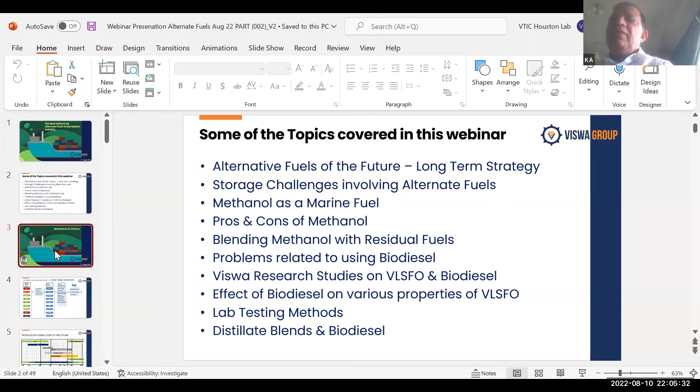Today's topic is really the burning topic today. So I will go over the alternate fuel, the choices you have for the future, and then I'll emphasize methanol as a fuel, as Dr. Vish mentioned. And then Dr. Sarah will cover biodiesel after that.

So first of all, with regard to the choices we have, the alternative fuel of the future, we have to look at the primary source where they are coming from. Because at the end of the day, that's what really counts, which I'll touch on in a subsequent slide, the life cycle carbon footprint. So the primary source is very, very important, where the fuel is coming from. The primary sources we have, as you know, are oil, natural gas, biomass, solar, wind, hydroelectricity, ocean energy, coal, and nuclear.

Then all these primary sources are processed and become the energy carrier, which we really use, like fuel oil, diesel oil, hydrogen, methane, methanol, ethanol and so on. Then the energy conversion takes place in the engines, we get the energy out of it and the ship moves, right?

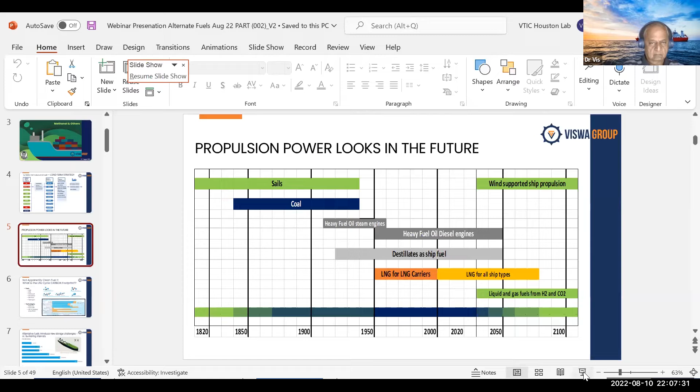So next is to see how the propulsion power looks in the future. We started with sails, looks like we'll end up with sails again. But these sails are different from olden days sails. They will be highly computerized to harness the best of the wind force. Then the transformation was towards coal. We are all familiar with heavy fuel oil and diesel oil we are using till today, including distillate. They will continue up to 2050, one way or other, in mixed form or whatever it is. LNG came into the picture, and it will continue beyond 2050.

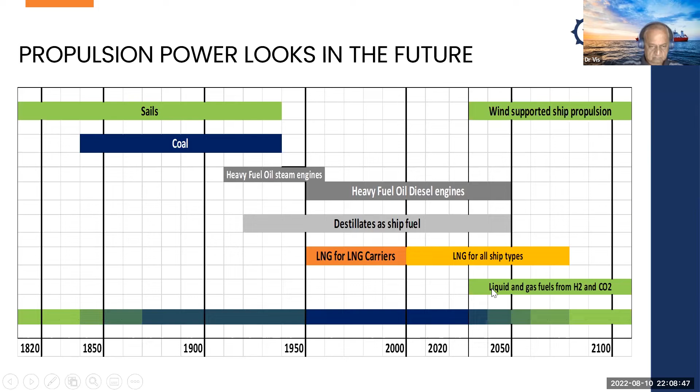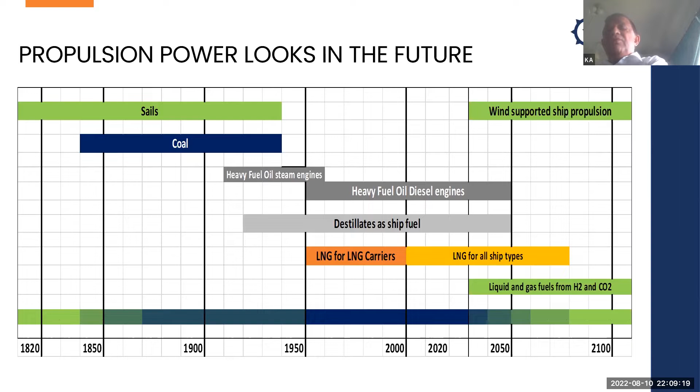But at the end, the fuel that really will win is possibly the liquid and gas fuels from hydrogen and CO2. And then you may ask about ammonia. Ammonia could be the carrier of the hydrogen. So ultimately, we are looking at hydrogen and CO2 as the fuel. Why this combination? Because at the end, if you produce even methanol, it will be from captured CO2, combined with hydrogen to make methanol. So at the end of the day, it looks like it will be hydrogen and CO2. So you are killing two birds with one stone: capture CO2, use hydrogen, produce methanol. That may be a good solution. Okay, next, please.

So as I mentioned at the beginning, the primary source of fuel is very important, because you can't simply say that I use hydrogen in the ship and it's very clean. It doesn't have any C, no carbon, no CO2, no greenhouse gas. But to process hydrogen, you need a lot of energy. It's very energy intensive. You can see the bar here. It is showing well to tank, meaning when it comes to the ship after being processed. And that itself is huge. Then it's not an angel anymore compared to today's heavy fuel oil, right?

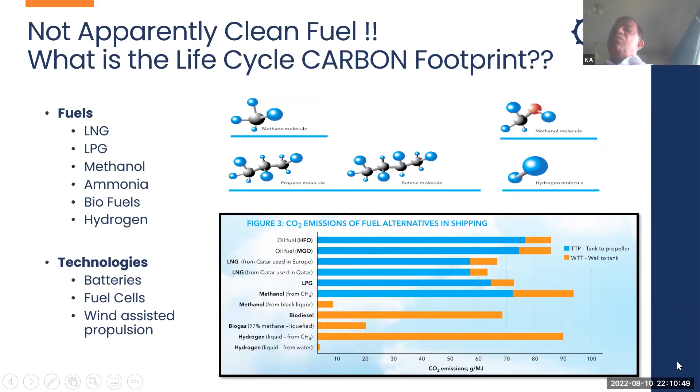So this is one thing we have to keep in mind with regard to the life cycle of that carbon you are using, right? Right from the well, and then when it ends up in the propeller after the energy is converted. So this graph shows you heavy fuel oil, how much is from well to tank and tank to propeller. Same goes for methanol, same goes for biodiesel. It's basically well to tank. The processing itself has its own carbon footprint. Next, please.

Another thing, for any fuel to be introduced in marine, many things need to be considered, like availability and infrastructure. And the first thing that comes to mind is storage, because it is very limited, right? When we talked about LNG in the past, it's the same thing. For the same round the world voyage, if you had say 10 tanks, to keep the same amount of energy you need 20 tanks of LNG.

So as you can see from here, the benchmark is low sulfur fuel oil. If it is one, LNG would need around 2 times that storage capacity. And LPG is almost the same. Methanol is 2.5. Ammonia is 4 times. Hydrogen is 6 to 10 times.

And with hydrogen, again, the question is how it will be carried, whether in gas form or in liquid form. Most likely it will be in gas form, like compressed hydrogen, for intra trading. That means you can bunker very frequently, and it can be compressed to 700 bar. But for ocean going vessels, most likely in liquid form, right?

So what this suggests is that if you are going for alternate fuel, you have to keep in mind what sort of tank capacity you will have. It simply means you may have to go for frequent bunkering instead of increasing the number of tanks in the ship. So you keep the number almost the same, but you have to bunker quite frequently. And when you bunker frequently, price discrimination between port to port also comes in.

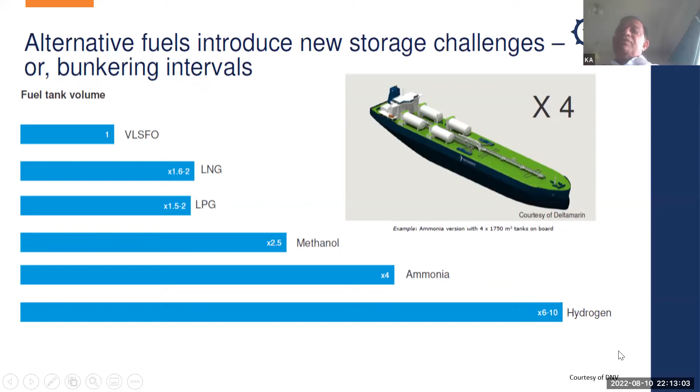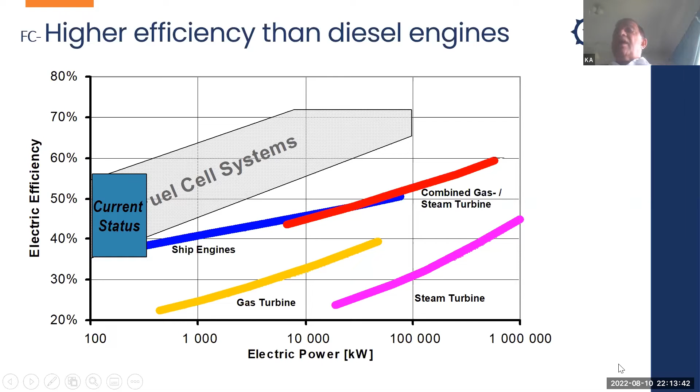With regard to the efficiency of the engines, as you can see from the graph here, as I showed at the beginning, maybe the fuel cell is going to win at the end. With the fuel cell, hydrogen is the primary source. But the efficiency of the fuel cell is much higher compared to today's ship engines, the diesel engines. You can see here it's around 70% efficiency, right? So this is what we are looking at, higher efficiency than the diesel engines. Next, please.

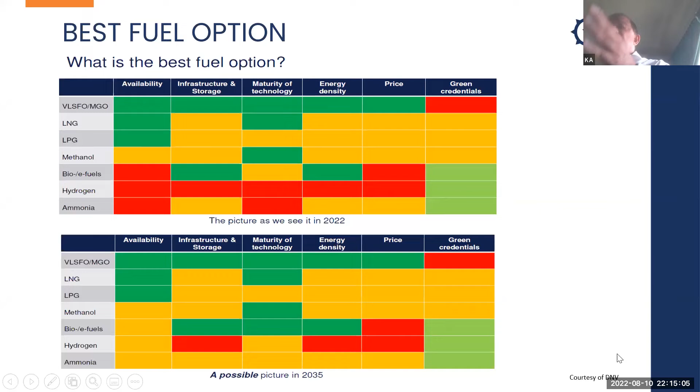I'm not going into detail, but you can get a feel of how it looks. Methanol is already there, more or less, in 2022, and in 2035 it will still be there, green and all. But for some things, like methanol's energy density, that's the default thing, right? You have to live with it. So, okay, next, please.

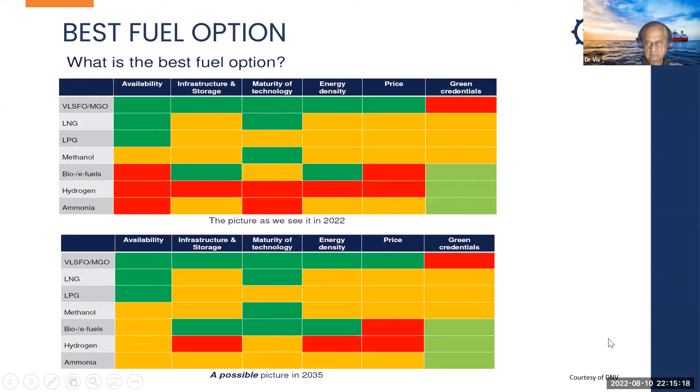So if you put it in a schematic diagram, it looks like this. We said ultimately everyone is looking at what is the primary source, not just saying that I burn hydrogen or I burn ammonia. You have to look at the primary source where it's coming from. So the primary source has to be renewable, take note of it. Nuclear is coming back, a lot of movement going on with regard to nuclear, with all its associated risk, but yet it is a cleaner fuel in a way.

So this renewable source will produce electricity. At the end of the day, the electricity that counts, that means to break, say, water by electrolysis into hydrogen and oxygen, we need electricity. So everywhere we need electricity. And then all this reformation, like even producing ammonia from nitrogen and hydrogen via the Haber-Bosch process, all this needs high pressure, high temperature, which again boils down to electricity.

So electricity from the renewable source, we have this electricity generated, and then we can have, in a simple form, electrolysis to break the water into hydrogen and oxygen. And then we can manipulate it. With hydrogen, we can produce hydrogen alone by itself, or hydrogen by synthesis with CO2. As I mentioned, it can produce methanol, and then you are killing two birds with one stone - you capture the CO2 from the ship's uptake, and then produce methanol yourself. So like this, e-diesel, e-LNG, e-kerosene, all will come. And the same hydrogen, when you synthesize with nitrogen, as in the Haber-Bosch process, produces ammonia.

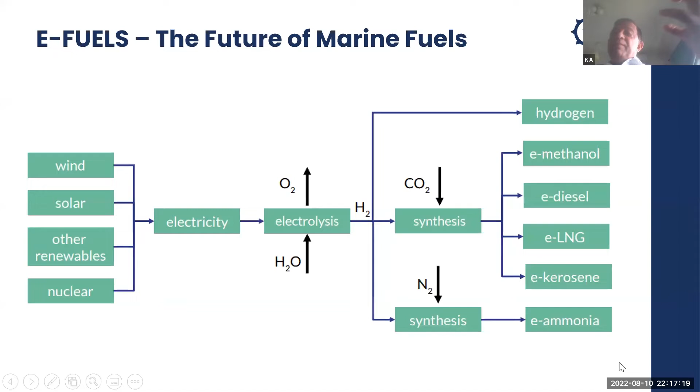So everything boils down again to the primary source, because this is what really counts.

At the end, another thing most likely to come is a mixed technology for power supply. This schematic shows the solar panel giving you solar energy, though it will be very limited for the ship given the limited surface area. But at the end, the solar energy goes to the battery, through the battery goes to the power management system, which is the central system that supplies electricity to the motor and turns the propeller.

So from solar, the primary source is very green. Wind sail, as I mentioned, will again feed into that power management system. And then below, be it LNG or ammonia that we put in, through some reformation you get hydrogen out of it, and that goes to the fuel cell. And again that reformation process is of course energy intensive.

But when it goes to the fuel cell, an interesting thing is you have low temperature fuel cells and high temperature fuel cells, but the high temperature fuel cell will ultimately win. With a high temperature fuel cell, there's even a byproduct, like the heat generated out of it - instead of wasting it away, you recover that heat, waste heat recovery. And then it again feeds to the power management, from fuel cell to the power management, and at the end you turn the propeller via the motor.

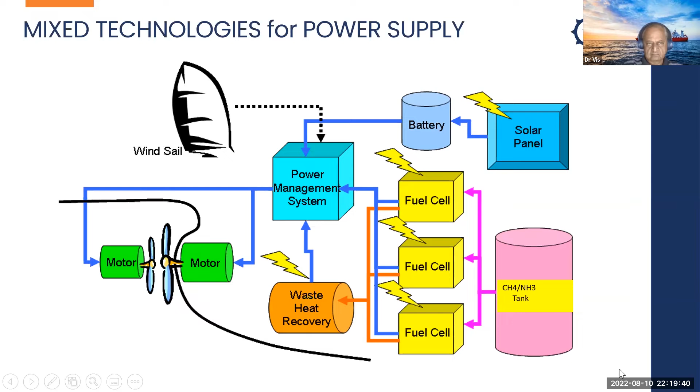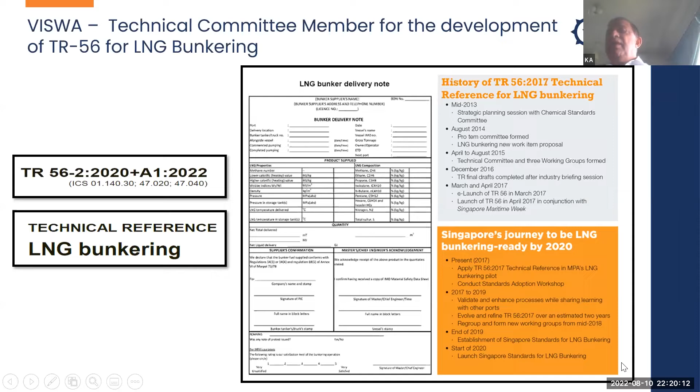Before I move on to methanol, just to let you know that Viswa is very proud to have the R&D - not many labs in the world do the kind of R&D that we do. And we are always at the forefront of all that development taking place. We were a member of the technical committee for coming up with the TR56 for LNG bunkering.

We are also partners with GCMD, the Global Center for Maritime Decarbonization - they had the press release on the 26th of July, and as you can see, Viswa is a partner of that. Here, a lot of green fuels will be tested, and many of them are not the usual tests - it will be sort of innovative testing. At the end, we are a partner for that and supporting this project.

We have done a 2 year biofuel field test with MESD, which is an NTU offshoot, and it was tried out on a ferry - the biofuel project. It was a 2 year project. In September, the report is supposed to come out.

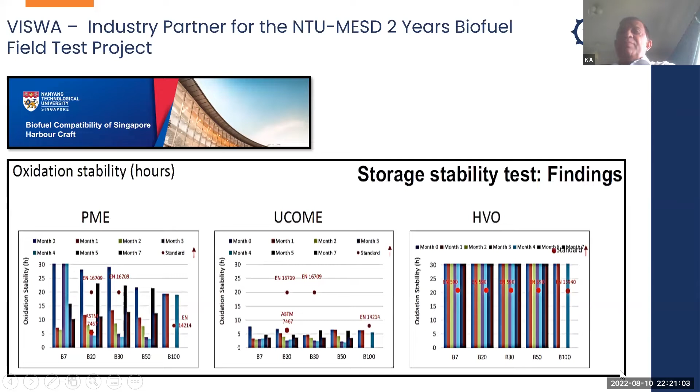Another one is ammonia, which is becoming more prominent, and Singapore is supporting this ammonia venture quite a bit. Now there's a GCMD project for ammonia storage, bunkering, and infrastructure, led by DNV and Surbana. And again, Viswa is a partner in this project.

So let's talk about methanol, a very few words on that. Methanol as marine fuel, as we have put on the table, you can see against the low sulfur fuel oil and heavy fuel oil and diesel oil.

A few things to note here: its flash point is very, very low, 11 to 12 degrees Celsius, compared to heavy fuel oil and VLSFO. As you know, regulation doesn't allow any flash point less than 60 to be stored in the engine room, so this is one thing. Second, the auto ignition temperature is also pretty high, 464 compared to heavy fuel oil around 320 or 350.

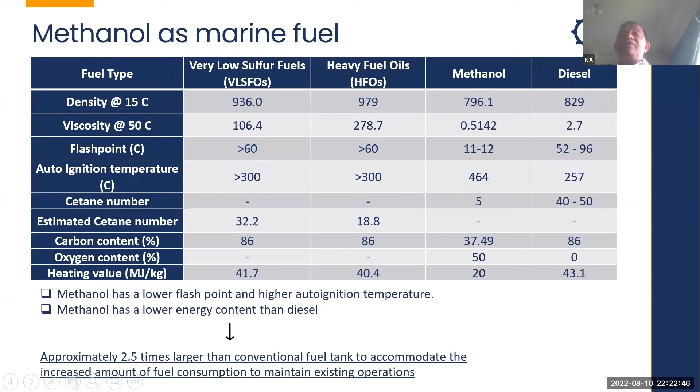Another thing is that the energy content of methanol is also on the low side. So what this really means at the end, the bone of contention is that methanol has a lower flash point, that's one thing to note. Another is lower energy content, which simply means you need more space to store.

So here you can see what modification would be required. Methanol, among all the alternative fuels, is more friendly with regard to modification required for retrofitting the ship, because its storage temperature is not like LNG and all - it's very normal temperature. You can store it, and the pressure is like atmospheric pressure.

It's simple to convert existing tanks to methanol to carry methanol. But it will be outside, of course, all the bunker tank, and the storage tank or service tank itself will be somewhere on deck, and from there it's a double wall pipe that goes to penetrate the engine room and goes to the engine, and you don't need any purifier for that. No purification needed - this is another good thing about methanol.

Whether it affects the seals and all these things - some of the seals are sensitive, but this is doable, it's not a big deal, and no heating is required. Rather, maybe you need some kind of cooling. So I think methanol in that sense is very friendly to convert.

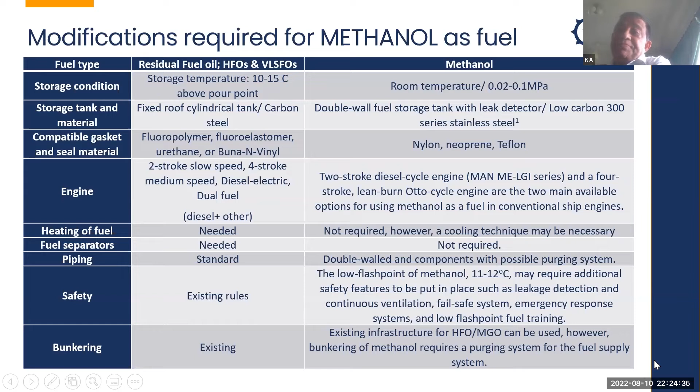So pros and cons - I think I have to be careful about the time, already 20 minutes. So methanol pros and cons of using methanol as marine fuel.

It has low emission, and it is biodegradable - in case it is spilled, it mixes with the water since it's alcohol, so it's not a problem. And economically, it is comparable with the gas oil price, with low cost for vessel conversion, as it hardly needs any modification, and infrastructure is already there more or less.

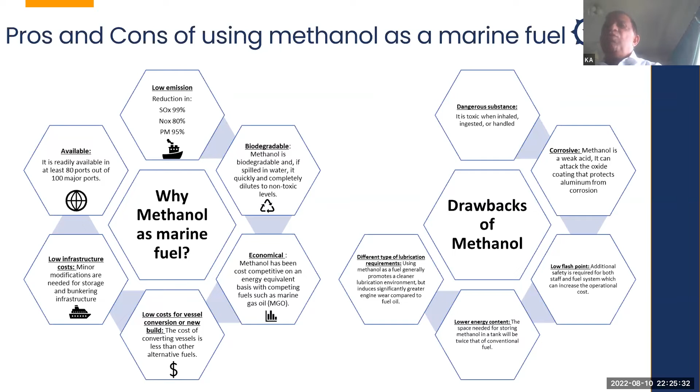Some drawbacks of methanol: it's a bit corrosive because it's a weak acid, and may affect some metals. It's also dangerous in a way if you inhale it, and toxic. Low flash point, I already touched on that. And low energy content means the space you need is more. Also, in lubrication you may need a different kind of lubrication for that.

These are some of the methanol powered vessels in operation and future. As you see, when any fuel comes in as new in marine, they always try to use it for the carrier itself.

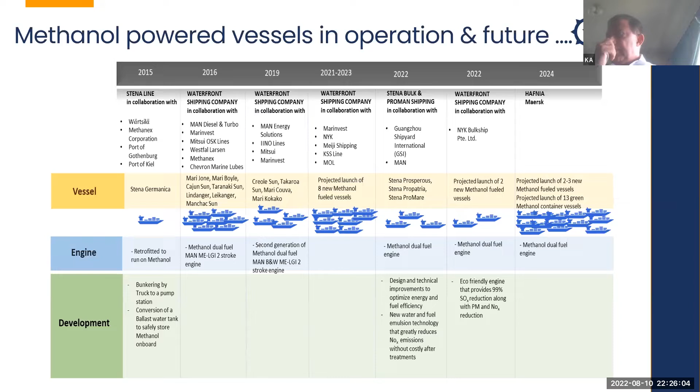Like LNG had the same thing - LNG was used as the fuel for the engine for the LNG carrier. Similarly, methanol carriers are the first ones to try out methanol. So that's the way it will go.

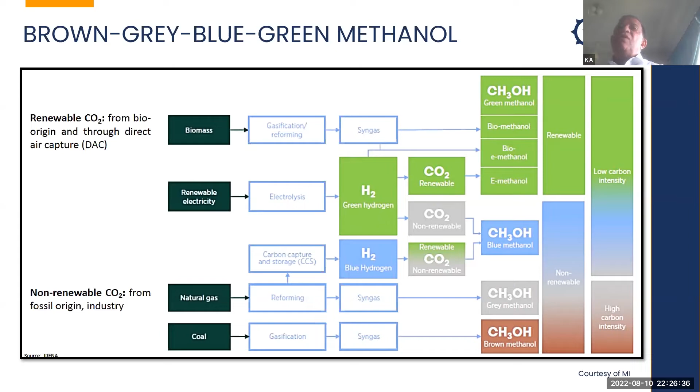Viswa has done some research on methanol. We started with the issues we have with methanol: phase separation due to the hydrophilic character of alcohol, and methanol is immiscible with VLSFO. Another issue is the flash point, as I mentioned, 11 to 12 degrees Celsius.

So what we have tried, solution-wise, is using blending agents such as water, dodecanol and isopropanol, and biodiesel and other additives.

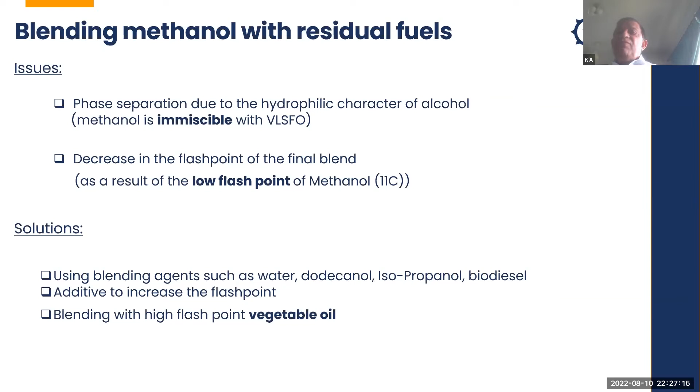Also, we try to increase the flash point by blending with high flash point vegetable oil, which we'll show in the next slide. As you can see here, the methanol, the water, biodiesel, and all of that - we have done the blending, and again, the other one is the vegetable oil.

You can see that the maximum amount of methanol that can be blended with VLSFO is only 0.1%, because if you go more than that, you fail the flash point test. At 0.1%, the flash point is 71. So if you go to 0.15% or anything higher, it will be lower than 60. So that is the maximum you can use.

But when you blend with vegetable oil, because vegetable oil's flash point is very, very high compared to even VLSFO - VLSFO is around 90, and here it's 350 - you can mix up to 5% methanol with the vegetable oil.

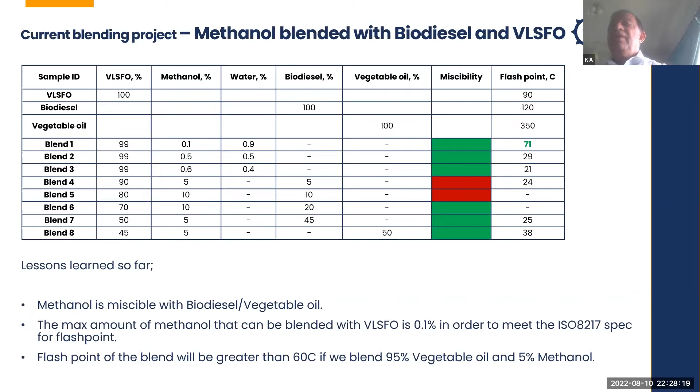Okay, next please. So for methanol, when you do lab testing, you can follow the ASTM E346-08 method, and another one is the IMPCA method. But both of them are more for the chemical property of the methanol, not so much about the performance, how it's going to behave inside the engine.

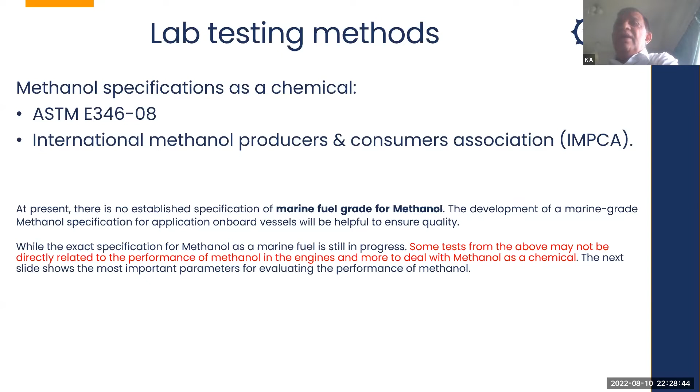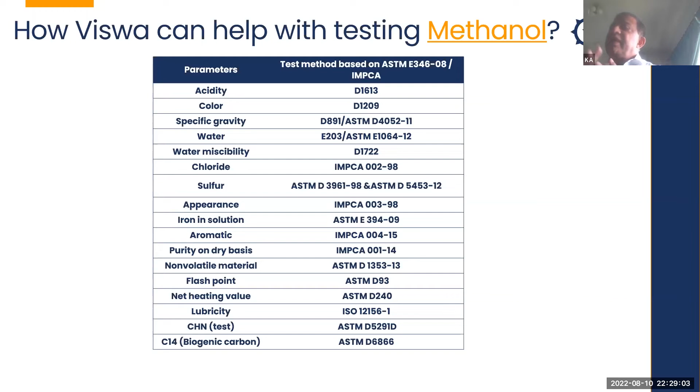So, with regard to performance, Viswa has come up with some test methods applicable for performance in the engine. These include acidity, water miscibility, iron, and those things - these are the tests we do, and it's again based on E346-08 and IMPCA.

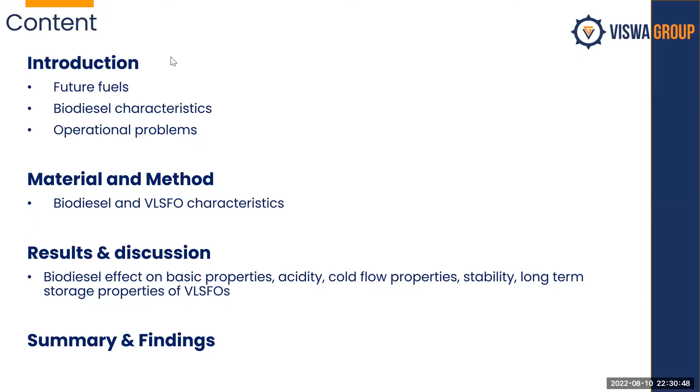In this part of the presentation, I want to talk about biofuel and applicability of biofuel in the marine industry. In the first couple of slides, I'm going to talk about the definition of biofuel, then characteristics of biofuel, pros and cons, and the operational issues that can happen with the biofuel sample.

Then I'm going to talk about the biodiesel and VLSFO samples that we have used for our study, followed by the results and discussion, and a summary of our findings.

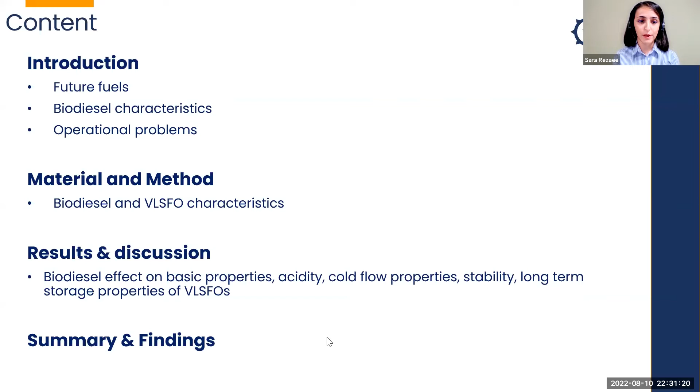Biofuel can be divided into biodiesel and hydrotreated vegetable oil. Based on ISO 8217 version 2017, there was a limit for the presence of FAME in residual fuel, which was 0.5%, and in distillate fuel it was 7%. But in June 2022, IMO approved the usage of B30 fuel, which means a mixture of 30% biodiesel with 70% distillate fuel, residual fuel, or VLSFO sample.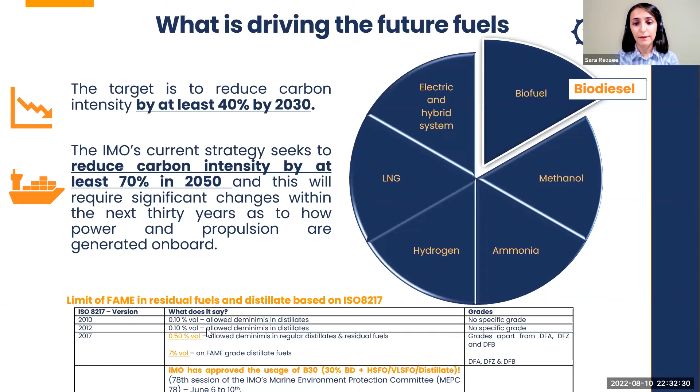During the last two years, some shipping companies have started trials of biofuel usage. Depending on the amount of biofuel they were using, they had different amounts of GHG emission reduction. For example, if they used 100% biofuel, the GHG emission reduction was 90%, and if they used 30% biofuel, the reduction could be between 20 to 25%.

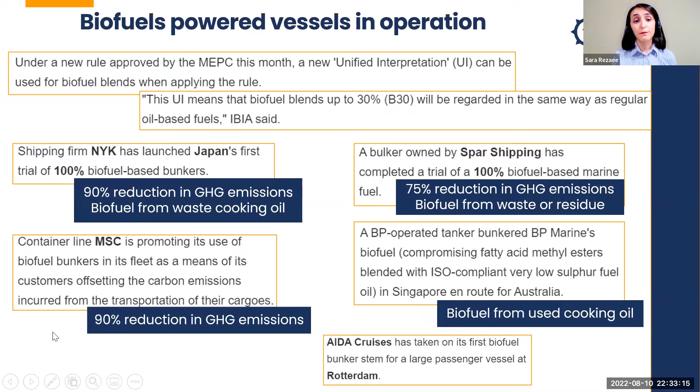But it's important what is the source of the biofuel. This reduction that I talked about was from biofuels coming from waste material.

Now, in terms of characteristics of biofuel, biodiesel has lower density and viscosity compared to HFO and VLSFO samples. In terms of ignition property, biodiesel has good ignition property. In terms of carbon content, biodiesel is 77%, which is lower than heavy fuel and VLSFO samples. As a result, the heating value of the biodiesel sample is lower than the heating value of the VLSFO or HSFO sample.

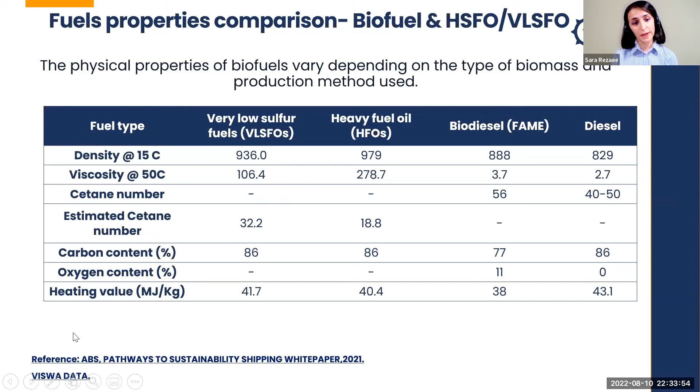If you look at the advantages and disadvantages of the biofuel, biodiesel will result in CO2 emission reduction, particulate material, and sulfur oxide emission reduction. Biodiesel mixes very well with petroleum diesel, and it has good lubricity properties. Biodiesel can be considered a drop-in fuel, which means that it can be used on board the ship without any changes to the infrastructure.

Now, in terms of the disadvantages of biodiesel, it can degrade over time faster in comparison to VLSFO. Also, it can have poor oxidation stability properties. It can have poor cold flow properties. Biodiesel is a good solvent, so it can attack rubber and sealing material. In addition to that, biodiesel can absorb water during the storage time, so it is more prone to microbial

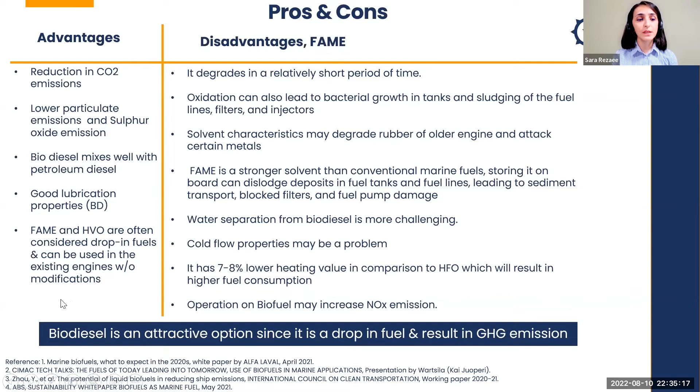contamination issues. Biodiesel has a lower heating value in comparison to HFO and VLSFO samples, so the fuel oil consumption of biodiesel can be higher. And finally, operation on 100% biodiesel may result in a NOx emission increase.

In terms of operational issues, using 100% biodiesel may have poor oxidation stability properties. It may have poor cold flow properties. Because biodiesel can absorb water, it is more prone to microbial contamination. And because of the amount of oxygen that biodiesel has in its structure, it can cause some corrosion issues because of high acidity. And the last issue can be incompatibility.

Now, for marine application, for the blend of biodiesel with distillate fuel or residual fuel oil samples, there are three important properties that we need to pay attention to. The first one is oxidation stability. Since biodiesel can have poor oxidation stability properties, it is important to monitor that the biodiesel blend can stay stable during the storage time. The second point is about acidity properties.

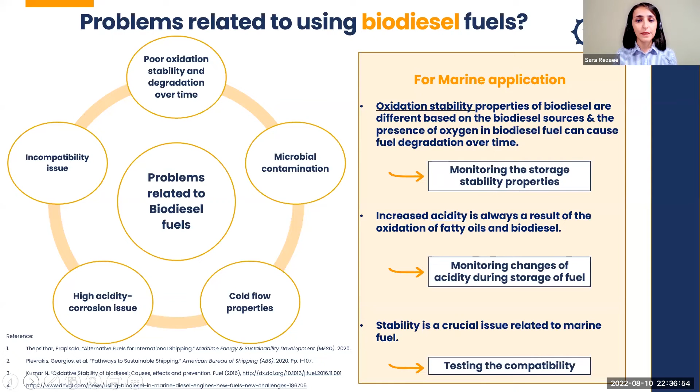Since biodiesel has oxygen in its structure, it can undergo oxidation reactions and it can cause some corrosion issues. So it is important to monitor the acidity of your sample during the storage and usage of the fuel. And finally, if you are using biodiesel for blending, it is important to test the compatibility of the biodiesel with the VLSFO or HSFO sample.

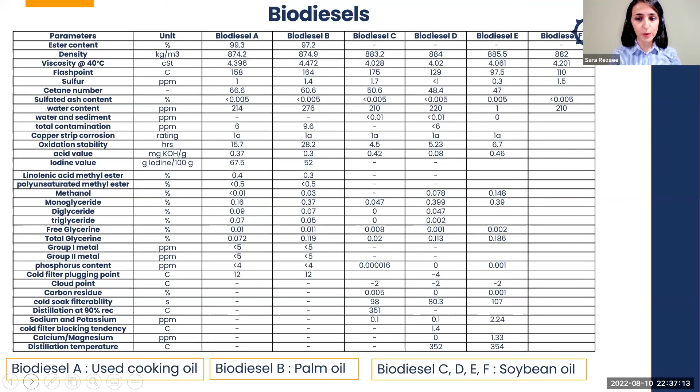Now, we have used VLSFO and biodiesel from different sources in our internal study. We have used 6 different biodiesel samples from used cooking oil, palm oil, and soybean oil sources. And we have used 9 different VLSFOs with different characteristics, from paraffinic to aromatic. The properties of the VLSFOs that we used in this study were within the specification of ISO 8217, except for a few samples where the sediment content was out of specification.

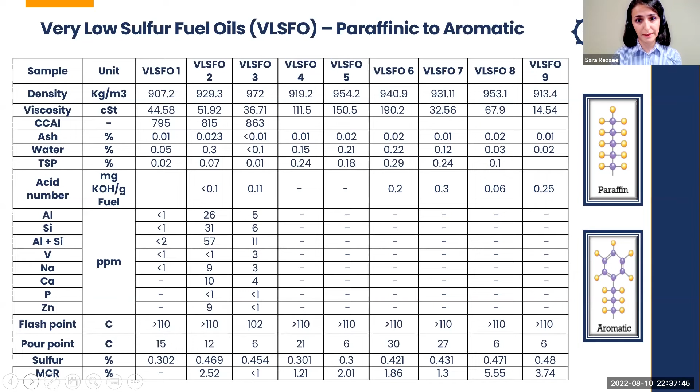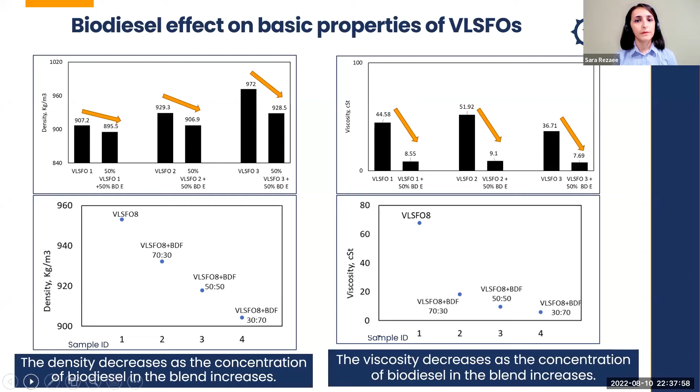The goal of this study is to blend the biodiesel sample with the VLSFO and evaluate the quality of the final blend. In terms of basic properties, I will start with density and viscosity. When we are blending the biodiesel with the VLSFO, it will result in a reduction of density and viscosity of the VLSFO sample. In terms of ash and water content, blending will result in the reduction of ash value and water content value.

With regards to the flash point, depending on the initial flash point value of the biodiesel and VLSFO sample, the flash point of the final blend can increase or decrease. In terms of the sulfur content, since the sulfur limit for the VLSFO sample can be up to 0.5, and for the biodiesel it can be only up to 10 ppm, blending the biodiesel with VLSFO will definitely result in sulfur content reduction.

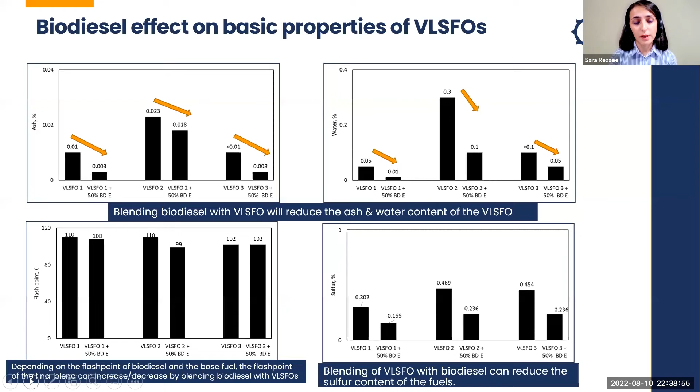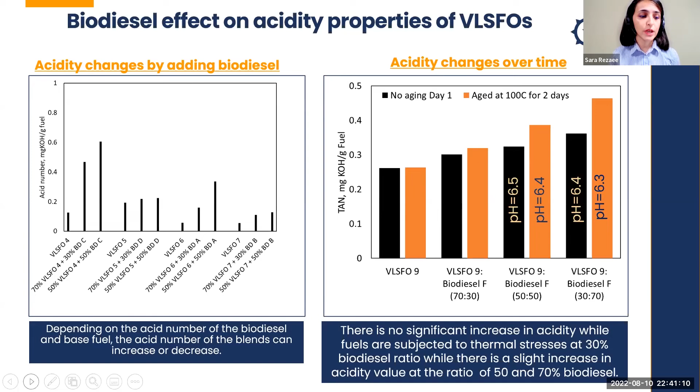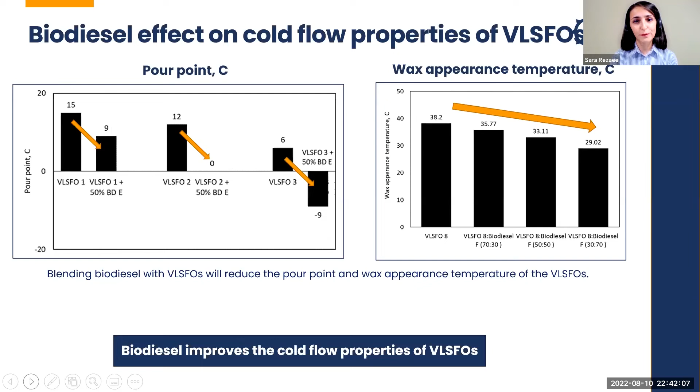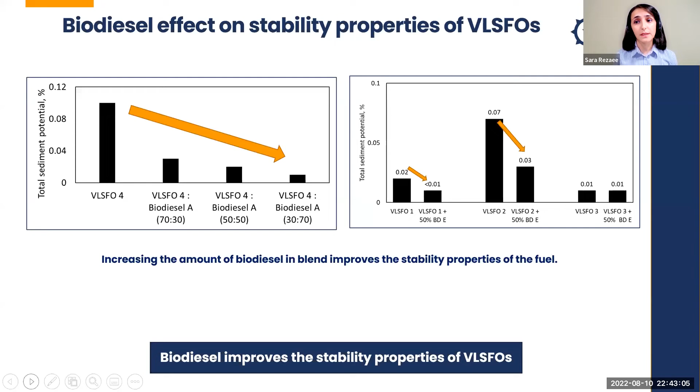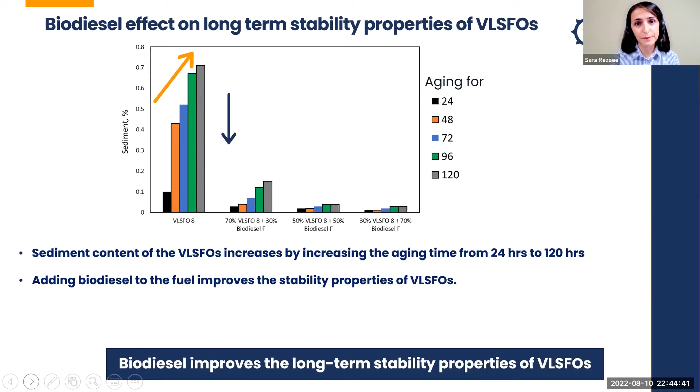And for the VLSFO which is blended with 50% and 70% biodiesel, you are seeing that all the 5 sediment values are below 0.1, which based on our algorithm means that these two blends can stay stable at least up to 60 days, while the VLSFO sample by itself was unstable from day one. Based on this result, we can get to this conclusion that biodiesel can even improve the long-term storage properties of VLSFO sample.

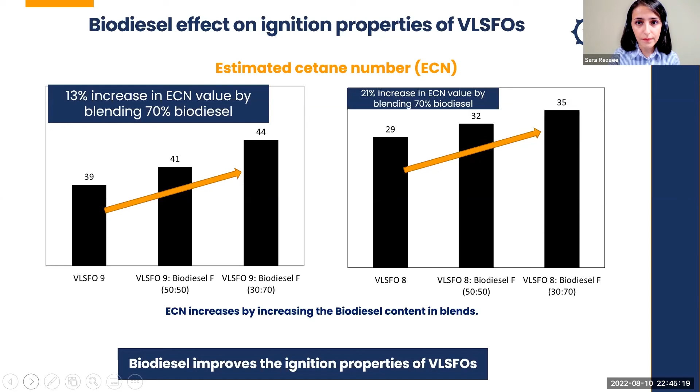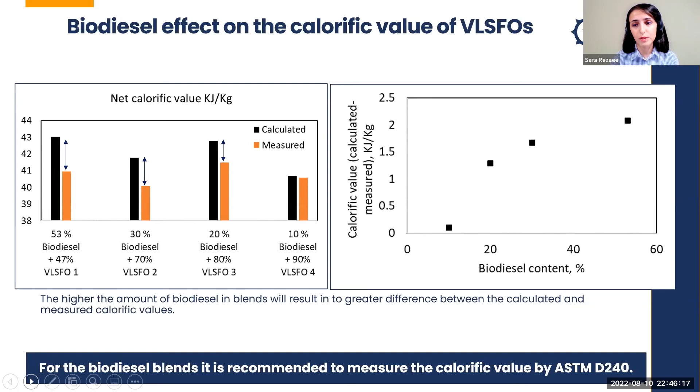On the right side, you will see the difference between the calculated and measured heating value versus the biodiesel content, which based on this result, we can conclude that by increasing the amount of biodiesel in the sample, the difference between calculated and measured heating value is increasing. Which means that for the biodiesel blend, we cannot use the calculated version of heating value, and we need to use ASTM D240 in order to measure the actual heating value of the biodiesel blends.

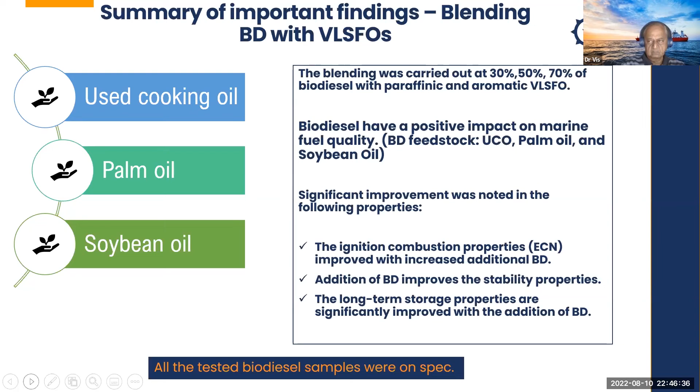Just giving you a summary of our findings so far, we have used biodiesel from used cooking oil, palm oil, and soybean oil sources. We have blended the biodiesel at the ratio of 30, 50, and 70% with the VLSFO. In terms of the basic characteristics, not only did biodiesel not have any negative impact on the basic properties of VLSFO sample, but also we have seen significant improvement in ignition property, stability property, as well as long-term storage stability properties of biodiesel blends. Please note that all the biodiesel samples that we have used, their properties were within the specification of ASTM or EN method.

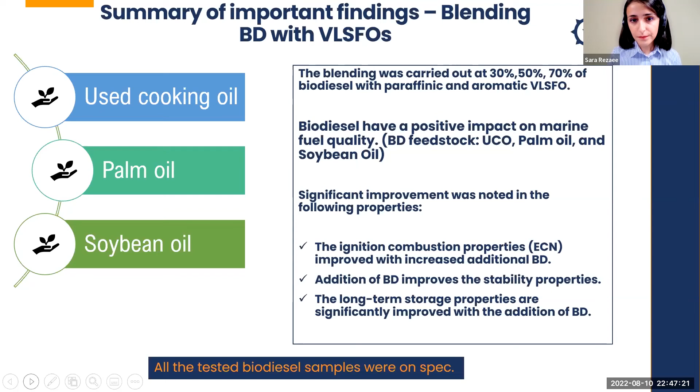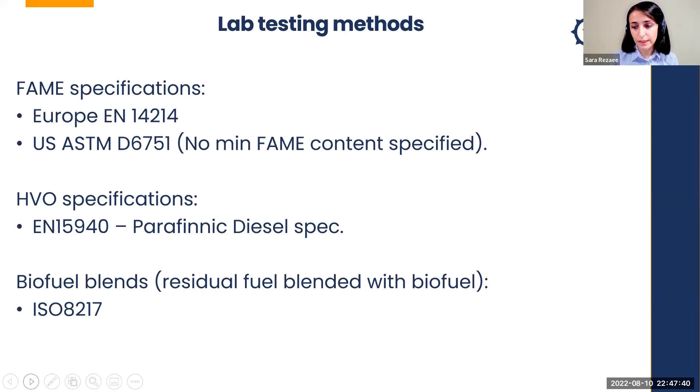In terms of testing, the pure biodiesel sample needs to be tested as per EN or ASTM method. Biodiesel blended with VLSFO or residual fuel needs to be tested as per ISO 8217. And these are the testing packages that we are offering for biodiesel blended with residual fuel. In addition to ISO 8217, we are recommending GCMS in order to ensure that biodiesel is not adding any chemical contaminants, polymeric contaminants, or free fatty acid to the sample.

Since biodiesel can absorb water during storage, it is more prone to microbial contamination, so we are recommending the microbial test. In order to evaluate the cold flow property, we are recommending the WAT/WDT test. And since biodiesel can have poor oxidation stability, we are recommending our in-house long-term stability assessment test in order to determine the shelf life of biodiesel blends. To evaluate the ignition property, we are recommending the estimated cetane number test by FIA.

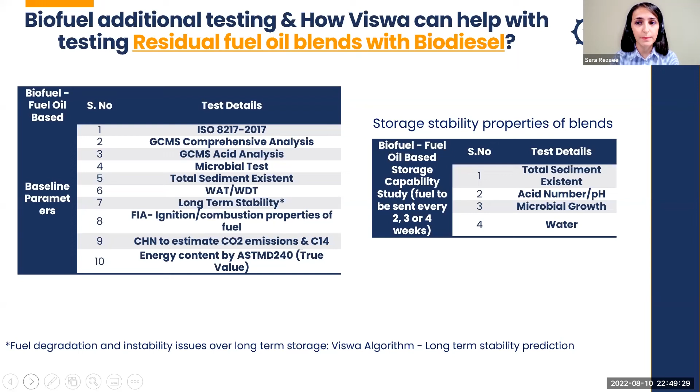In case you want to calculate the carbon emission factor, we are recommending the carbon, hydrogen, nitrogen analysis test. If you have an unknown blend, we are recommending the C14 test to determine the amount of biogenic carbon in your sample. The last point is heating value, which needs to be tested as per ASTM D240. Since these blends are new to the market, we recommend monitoring changes in sediment content, acidity value, microbial growth, and water content during storage and usage of the fuel.

And this is the testing package that we are offering for biodiesel blended with distillate fuel. It's the same testing package. The only difference is that we are not offering the long-term stability assessment, because our method is only applicable for residual-based fuel samples. And for distillate samples, we are not recommending WAT/WDT, because we can measure the cloud point and CFPP for the distillate samples.

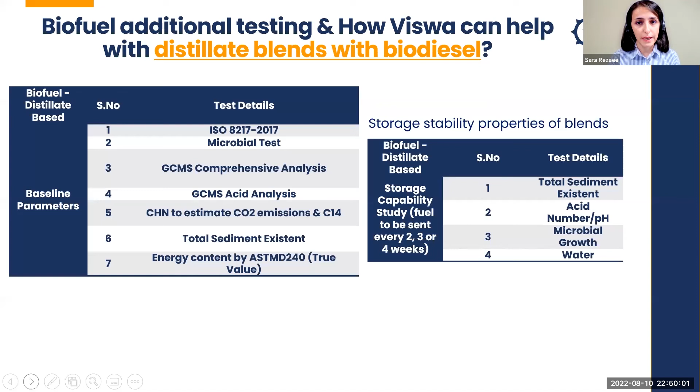My last slide is about our current biofuel projects. We are still characterizing more biodiesel samples from different sources and blending them with VLSFO to evaluate the quality of final blends for marine application. The second project is about using additives to improve the quality of biodiesel blends. And the last project is about using off-spec biodiesel samples for marine application.

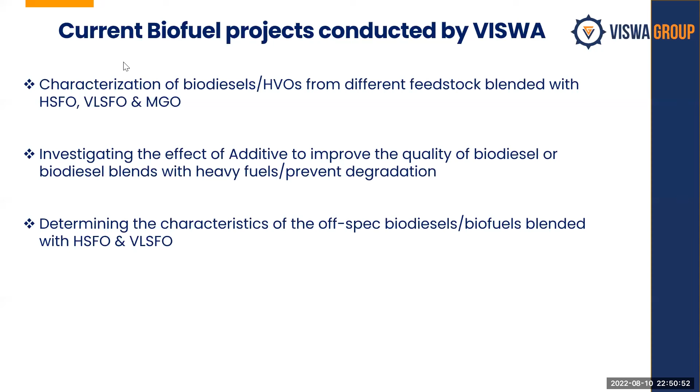Dr. Alam, does methanol fuel help in EEXI and CII? Yeah, it certainly does. Because EEXI uses the EEDI formula, and in that, the alternate fuel carbon factor is affected by methanol, and the same goes for CII. Thank you. Is methanol retrofitting really a viable option?

It is. As I mentioned, among all the alternate fuels, I think methanol is the most friendly with regard to retrofitting. By virtue of it, it doesn't have to be cryogenic or refrigerated, so the retrofitting cost is pretty low and it is a viable option. As a matter of fact, in the slide I shared, one of the ships is actually doing that retrofitting. I think Waterfront or Stena.

Will there be a universal engine which can burn all types of alternate fuels? Yeah, this is very interesting. Engine makers are working on it from two different angles. One is that in new builds, they are building the engine with some kind of kit so it can be converted from one fuel to another. Another is for existing engines, whether with similar kits all types of alternative fuel can be used. This is in their R&D, it is already happening.

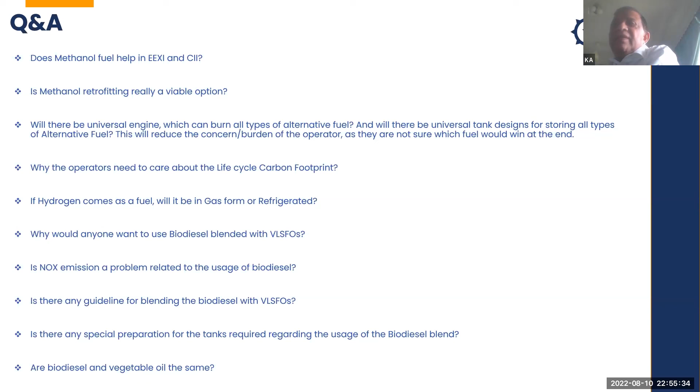So for the feeder ships, or for intra-trading, it is a viable option. They can bunker more frequently. But for the long haul vessel, it is a different story. I think it has to be in refrigerated form, one way or other. Thank you.

Dr. Sara, why would anyone want to use biodiesel blended with VLSFOs? Actually, because of three reasons. The first one is that biodiesel mixes very well with the residual fuel or VLSFO sample. The second one is that biodiesel will result in GHG emission reduction. And the third one is that biodiesel is considered a drop-in fuel, which means it can be used on board the ship without any changes to the infrastructure.

And is NOx emission a problem related to the usage of biofuel? If the biofuel content is less than 30%, NOx emission is not going to be a problem. But if the fuel has more than 30% biofuel, it needs to be verified that the engine is not altered beyond the approved parts and settings of the NOx technical file in order not to require NOx testing.

And are there any guidelines for blending biodiesel with VLSFOs? At this time, there is no specific guideline for blending purposes. The only thing we recommend before blending is to ensure that the biodiesel is compatible with the VLSFO or HSFO sample. Also, they need to make sure that the biodiesel blends stay stable at least during storage and usage of the fuel. And is there any special tank preparation required for using biodiesel blends? Apart from proper cleaning of the tank, nothing is required.

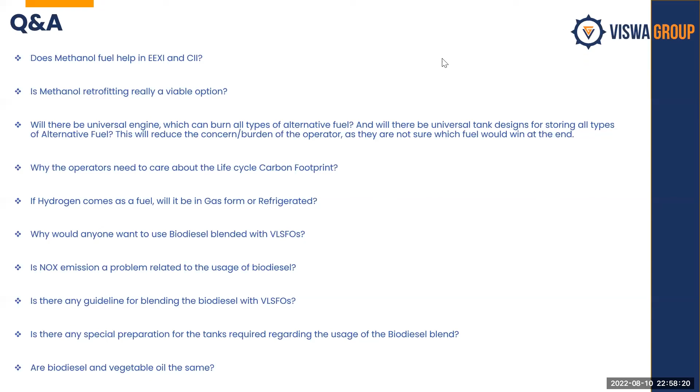Yes, we had 3 questions in the polls, and the results were as follows. For the question of what is your preference in marine fuels, the current VLSFOs, biofuels, and methanol, this is a multiple choice question. 50% of the audience said current VLSFO is the preference, 48% said biofuels, and 19% said methanol.

For the question on have you used biofuels or biofuel blends, 25% said they have used biofuel or biofuel blends. 75% of the audience said they have not. And for the final question, if the people who use biofuel blends had any issues, 64% said they had no issues at all when using biofuels or biofuel blends. 36% said they had some issues, and 0% said they had many issues. These were the 3 poll results.